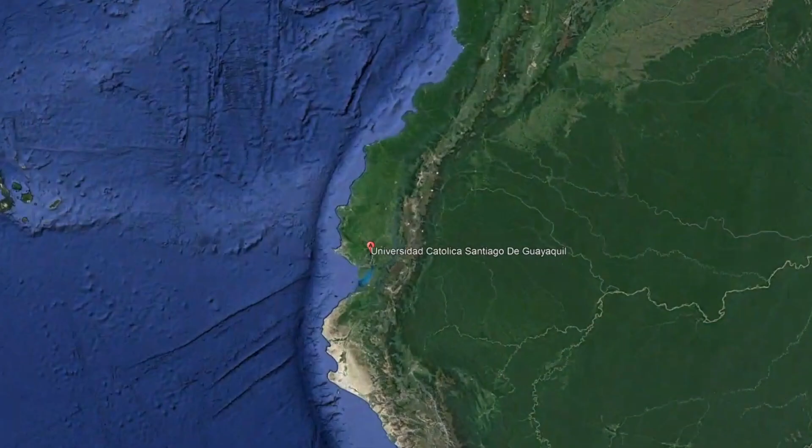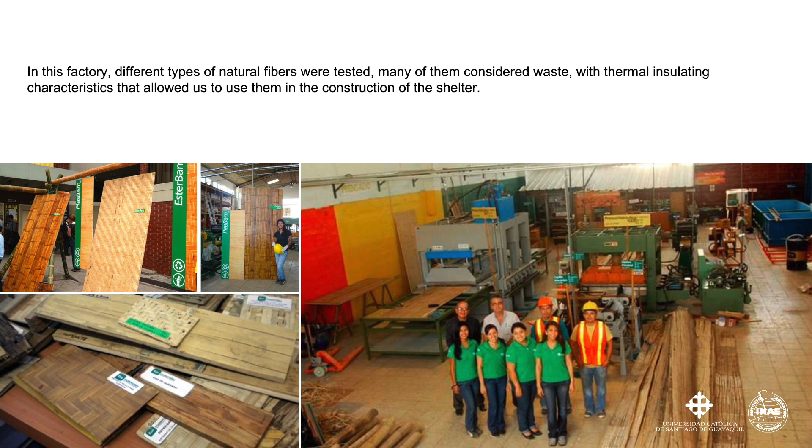This project arises from the Faculty of Architecture and Design of the Universidad Católica de Santiago de Guayaquil, which has an ecomaterials factory in Durán, Guayas Province, Ecuador. In this factory, different types of natural fibers were tested, many of them considered waste, with thermal insulating characteristics that allow us to use them in the construction of the shelter.

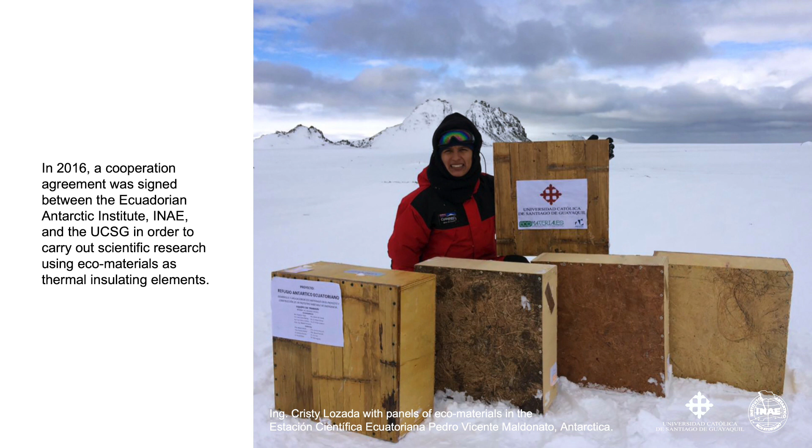In 2016, a cooperation agreement was signed between the Instituto Antártico Ecuatoriano and the Universidad Católica in order to carry out scientific research using ecomaterials as thermal insulating elements. Tests were made in previous expeditions to demonstrate the behavior of fibers such as bamboo, banana rachis, coconut tow, and abaca with the low Antarctic temperatures.

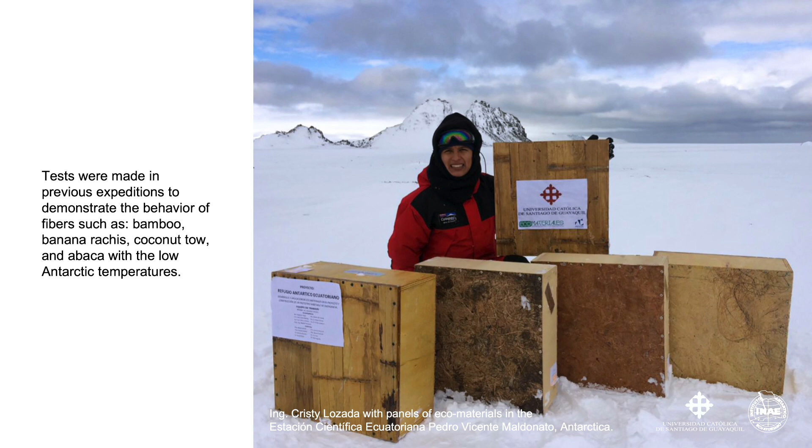The first prototype was built on the slope of the Chimborazo volcano under the direction of the architect Alejandro González, in which 100% of the tested ecomaterials were used. The second prototype presented a red metal structure as a supporting element for the ecomaterials panels, and it was exhibited in 2018 outside the faculty of the university, prior to its transfer to the facilities of the Instituto Oceanográfico y Antártico de la Armada.

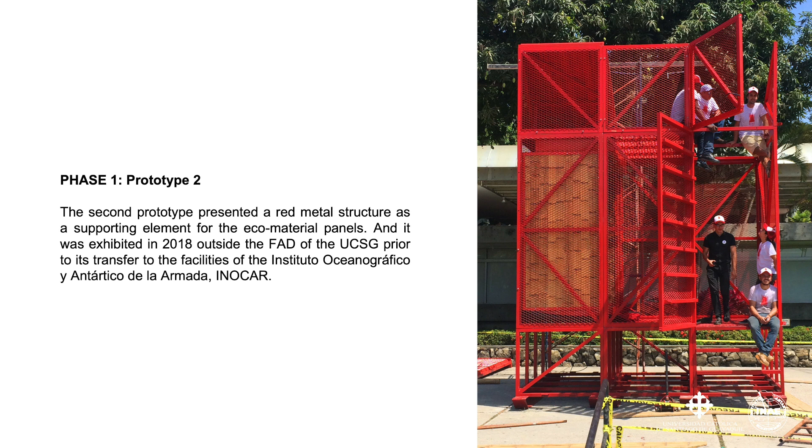After seeing the second prototype, the Instituto Antártico Ecuatoriano requested certain adjustments to the architectural design. First, recover the impact created by the exposure of natural fiber, as was done in the first prototype, by means of a second external skin and reduce the visual proportion of the metallic structure. Second, improve anchoring to the ground to prevent the shelter from overturning in the face of hurricane winds from Antarctica.

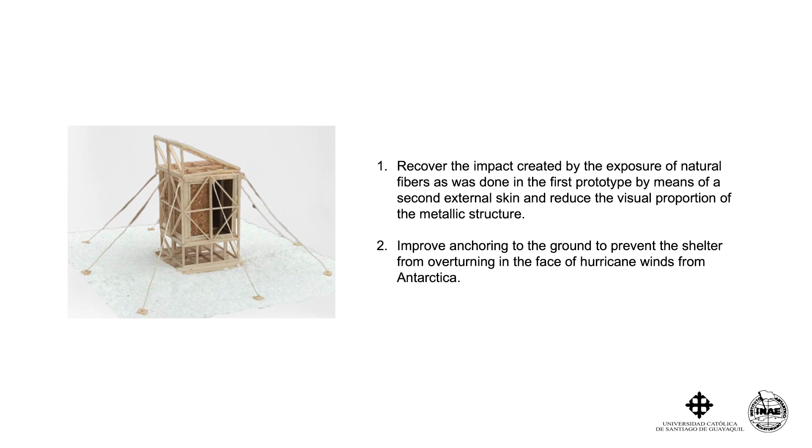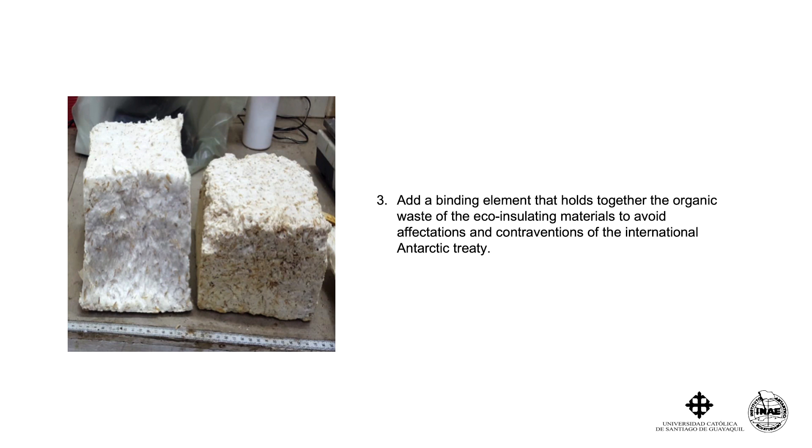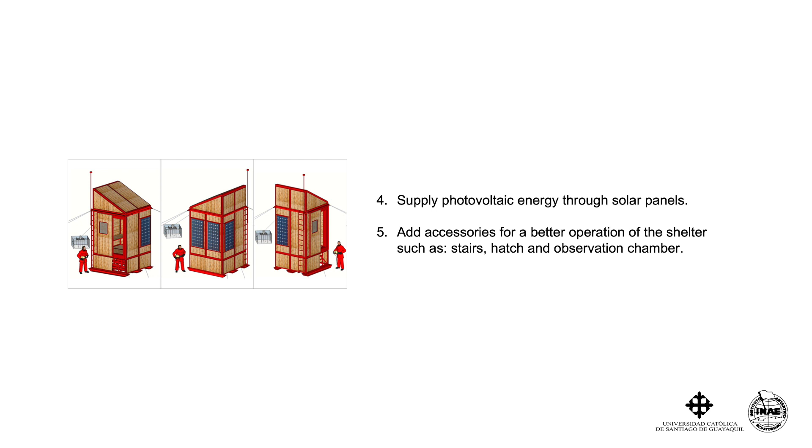Third, add a binding element that holds together the organic waste of the eco-insulating materials to avoid affectation and contravention of the International Antarctic Treaty. Fourth, supply photovoltaic energy through solar panels. Fifth, add accessories for a better operation of the shelter, such as stairs, hatch, and observation chamber. The final approved prototype was inaugurated on February 19, 2019, in front of the Catholic University and Ecuadorian Antarctic authorities.

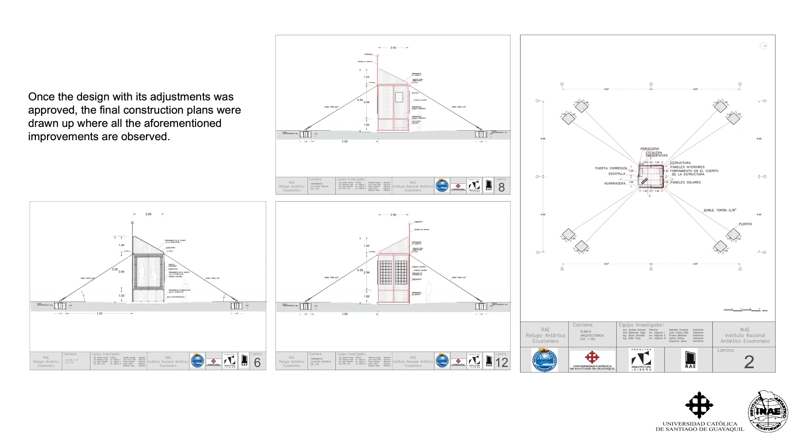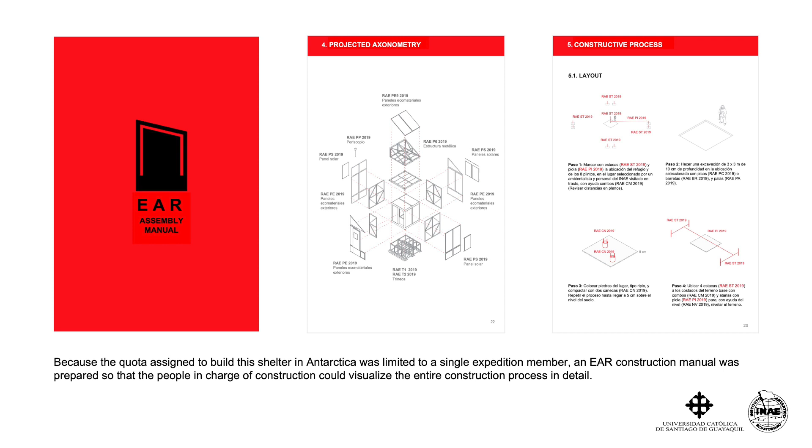Once the design with its adjustment was approved, the final construction plans were drawn up where all the aforementioned improvements are observed. Because the quota assigned to build this shelter in Antarctica was limited to a single expedition member, an EAR construction manual was prepared so that the people in charge of construction could visualize the entire construction process in detail. The construction schedule in Antarctica was drawn up, restricted to 11 days of construction due to the times available to the expedition before being picked up by the Chilean Navy that provides transportation services to the Ecuadorian expedition members.

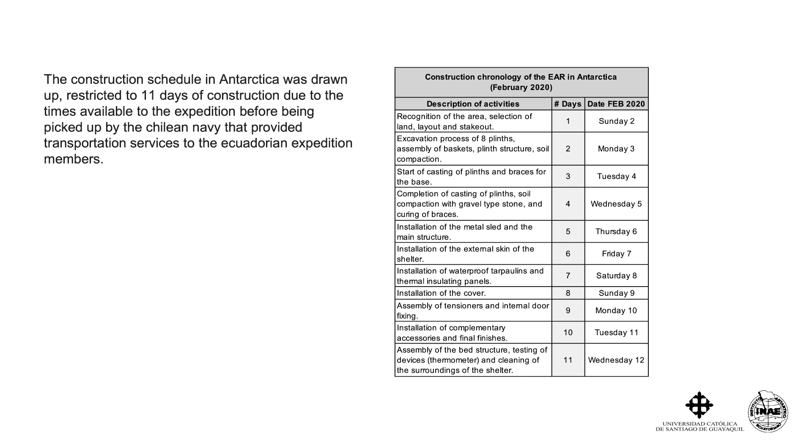The trip began by plane from the city of Guayaquil, making a stopover in Santiago de Chile until reaching the city of Punta Arenas. Here, the means of transport was changed to embark on the military ship Aquiles of the Chilean Navy. After 4 days of navigation, the Antarctic continent was reached where the islands were explored for 4 more days according to the ship's itinerary. In the first approach on the Pedro Vicente Maldonado Ecuadorian Scientific Station, the strong waves prevented the landing of the container from the refuge, having to continue its route to the Chilean station.

On the way back, the ship would try again to make the landing, which was happily possible thanks to the fact that the wave condition allowed it. The 12 days assigned to the expedition members for their stay at the Ecuadorian station prior to the return shipment would begin. Of the 12 days, 11 were dedicated to the construction of the Ecuadorian Antarctic Refuge.

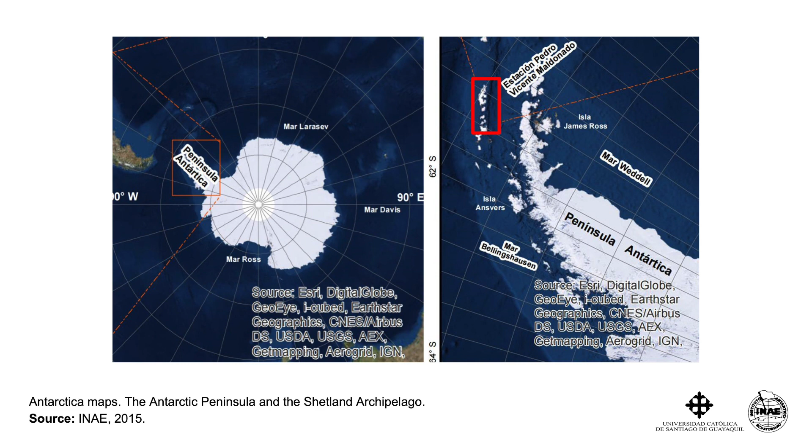As in many construction processes, there are unforeseen events, and ours was no exception. The selected place, known as Whale Graveyard, was not suitable for construction due to the low resistance of its soil and especially the presence of lichens. Due to this, it was decided to build the project on a higher, more resistant and flat point, the sector known as the Sleeping Lion, located in Punta Orion.

When the tide finally allowed the EAR container to be brought to shore, another problem arose. The base could not roll due to the weight of the container. Due to this, we had to manually remove the pieces of the shelter until the weight was optimal to roll the container onto dry land.

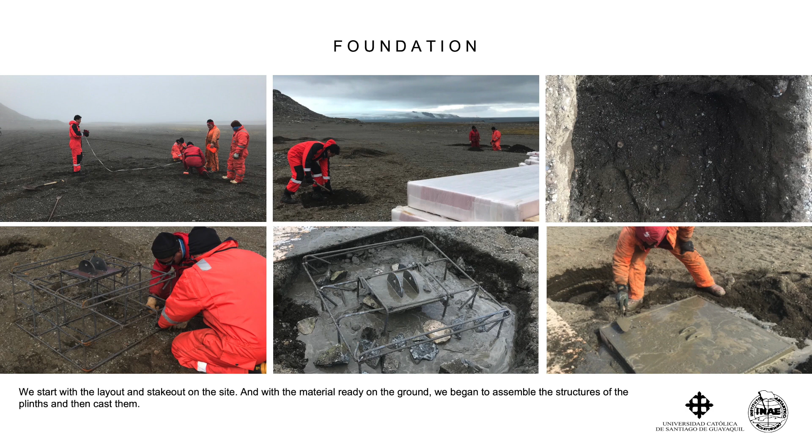We started with the layout and stakeout on the site, and with the material ready on the ground, we began to assemble the structures of the plinths and then cast them. Then we cast 2 braces that together with the compacted rubble would function as a base for the refuge. The next step was to assemble the metal structure made up of 2 sleds designed to move the refuge in case it is required elsewhere, and a set of metal frames.

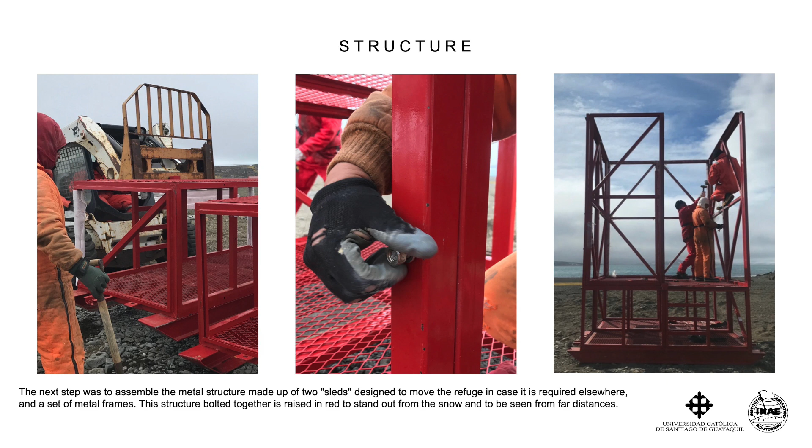This structure, bolted together, is painted red to stand out from the snow and to be seen from far distances. With the structure ready, we proceeded to place the external bamboo skin that, together with a thick internal canvas, would protect the thermal insulating panels from direct contact with the snow and from the impact of rocks that could reach it through hurricane winds.

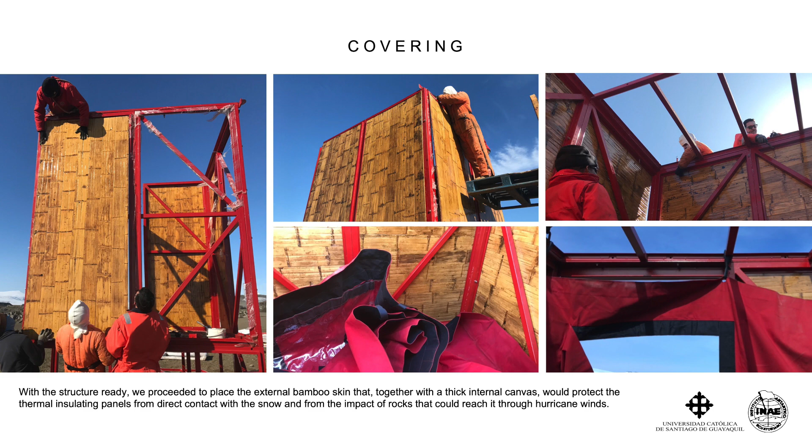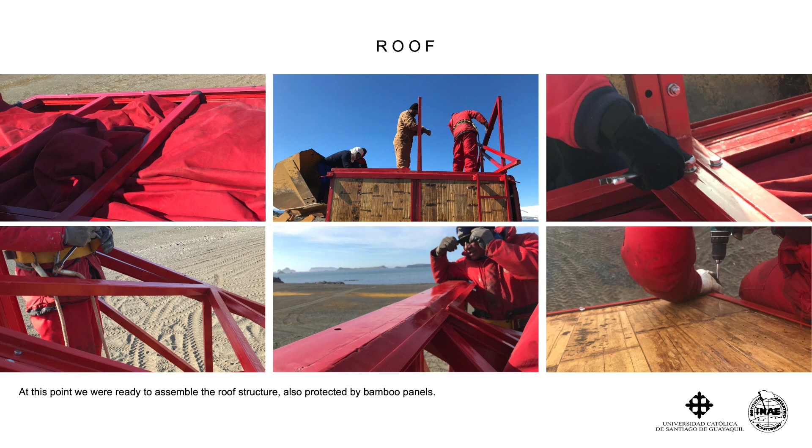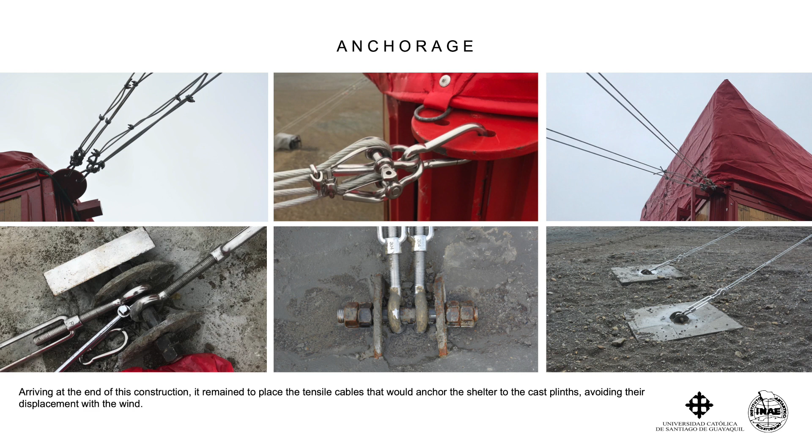Protected from the icy winds, we continued with the placement of the 25 cm thick thermal insulating panels on the floor, walls, and ceiling. At this point, we were ready to assemble the roof structure, also protected by bamboo panels. In the event that the snow prevents access to the isolated point of the refuge, a loft allows the rapid shelter of the expedition members. Arriving at the end of this construction, it remained to place the tensile cables that would anchor the shelter to the cast plinths, avoiding its displacement with the wind.

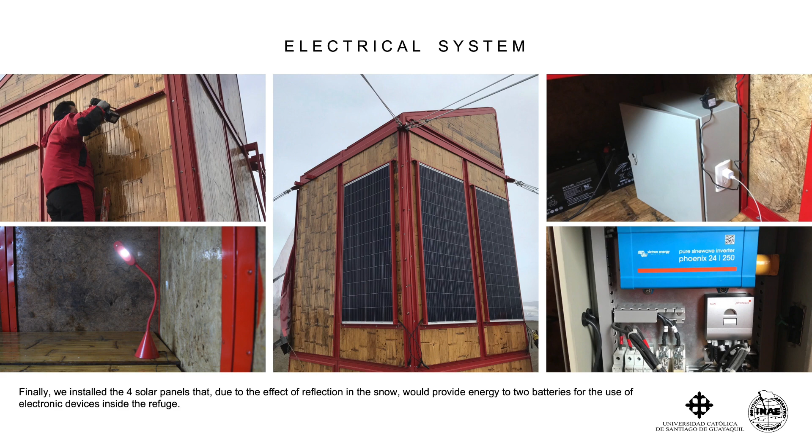Finally, we installed the 4 solar panels that, due to the effect of reflection in the snow, would provide energy to 2 batteries for the use of electronic devices inside the refuge. Temperature outside the refuge, 11 degrees Celsius. Thermal sensation inside the refuge, 24 degrees Celsius. And this is how it went.